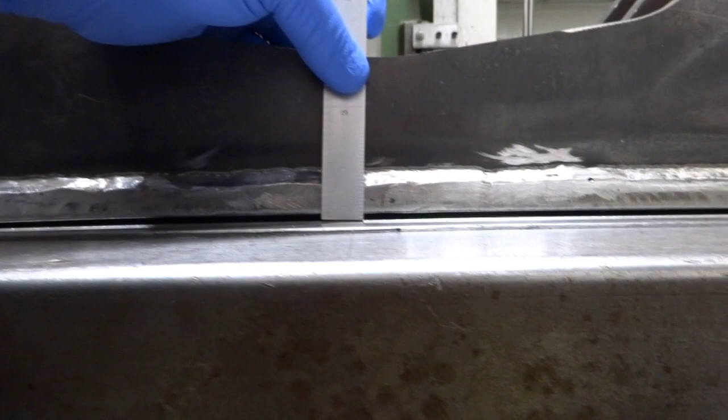This is the frame, all welded up. I was quite happy there wasn't too much distortion. It humped up in the middle just like the original frame did, about 1/8 of an inch. So that's not too bad.

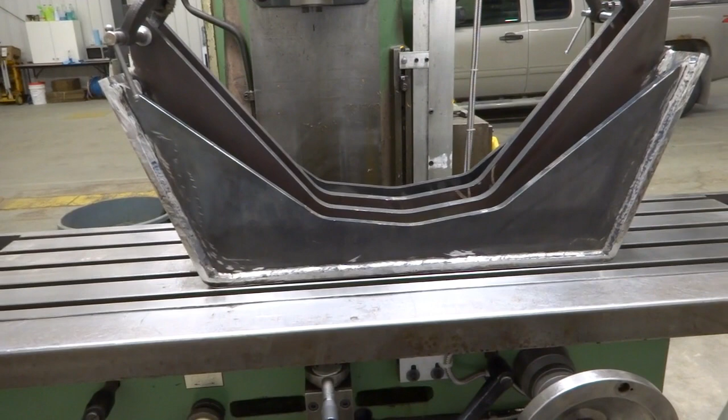I'm going to have to remove that because the piece—if you go back to the first video, you'll see laying on the floor a large piece that attaches to the machine that this bolts to, and it's quite a bit thicker and stiffer than this frame. In the original setup, the bolts are here and here, here and here, and if you bolt that to that part, it'll likely cause the frame to warp.

So I'll do all the work to get the holes bored in straight and everything like that. And then when we bolt it down to the piece, if this hump is in it, it's likely going to warp again and go out of line.

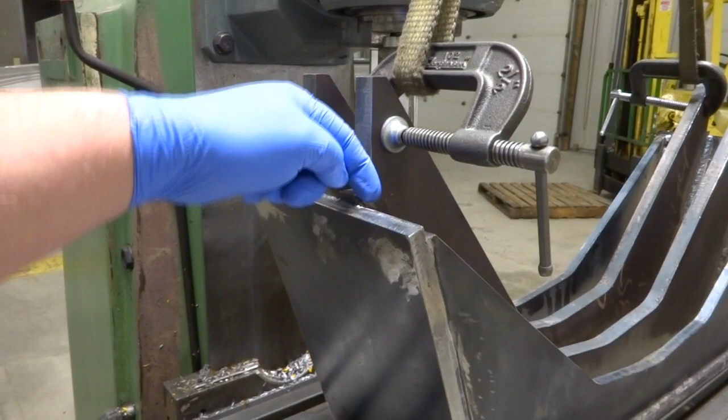So my plan is to take a skim cut along here and clean this up. What I was going to do first, as I mentioned in the earlier video, is machine here and here so the boss plates can go in.

Now, my plan was to machine it—I'll just use this as an example, using an end mill like this to come in and cut this away. In fact, I need a little bit longer end mill. Maybe one more like this.

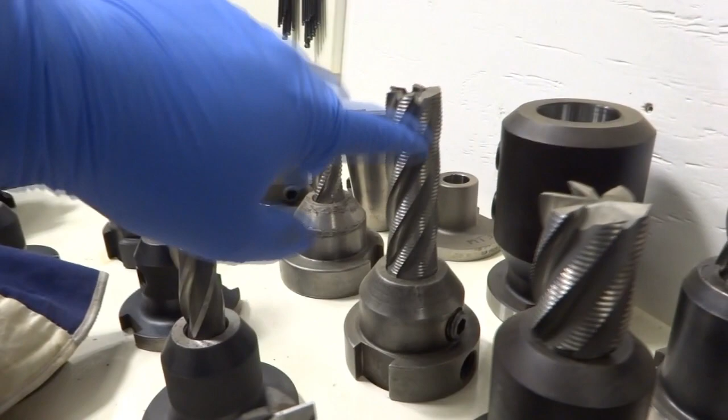But if we look here, you can see there's no way I can get an end mill holder in that vertical head and have it not interfere with the part. I guess what I'm trying to say is the part is too tall. I've got the knee bottomed out—right now it's as low as it can go, and you can see the frame is too high.

So yesterday afternoon I spent a little bit of time scratching my head trying to figure out how I'm going to actually machine this, and I came up with a plan which is roughly drawn out here.

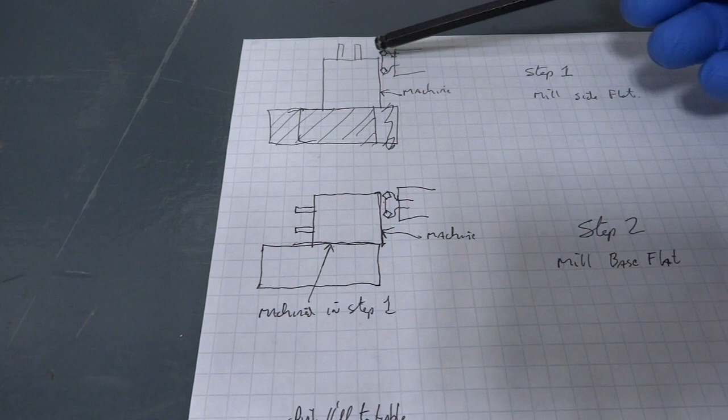The first step—this is looking at that frame from the end. These two pieces up here are these pieces here. My plan is to mount it essentially the way it's sitting on the milling machine right now, overhang it past the table slightly.

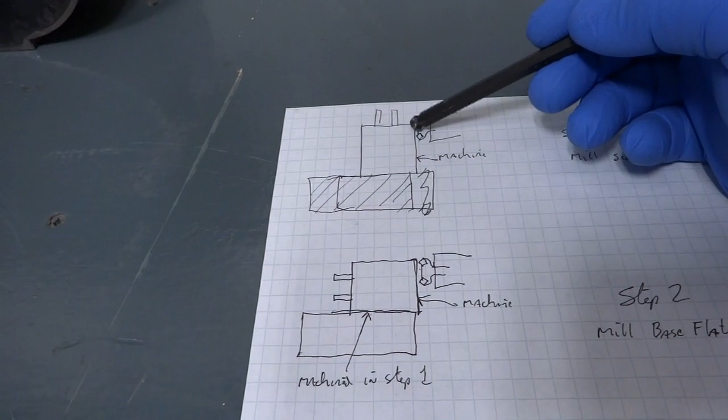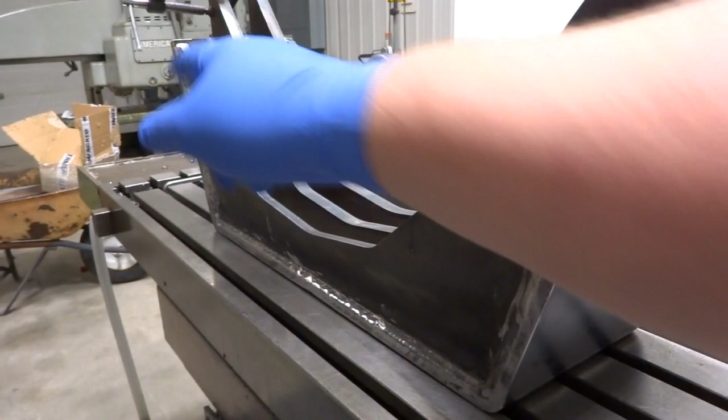Then go with the face mill and machine the edge—that'll be this edge. These pieces were three separate pieces, the bottom and the other side. I tacked them together holding it by hand, so these aren't necessarily perfectly in line. They were welded and then the welder cleaned them up, so I can't rely on this to be a flat surface.

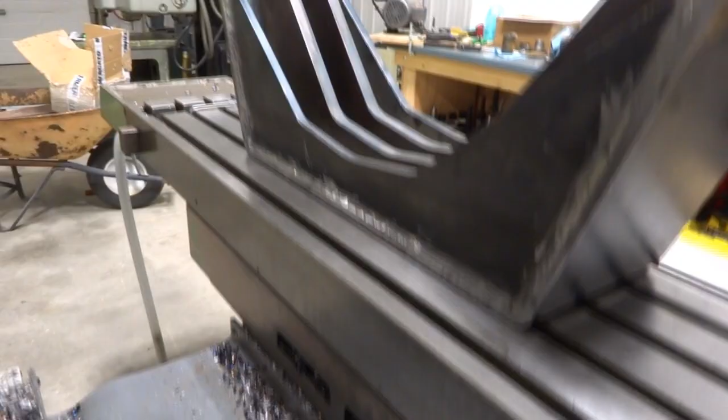So if I slide this over so it overhangs the edge of the table, and I take the vertical head off and use the horizontal spindle, I can come in here and clean this edge up and get myself a flat edge.

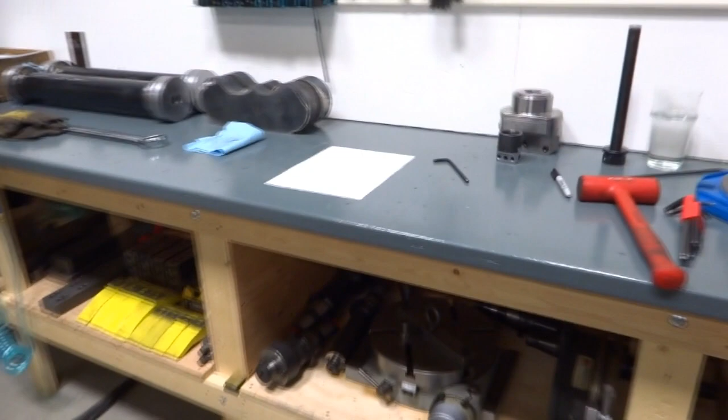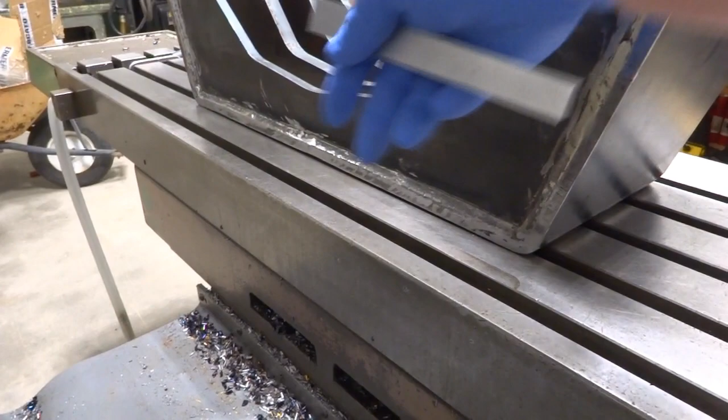Then the next step is to take the piece and lay it on the edge that was just machined, overhang it over the back of the table again slightly, and expose what's currently the bottom of this frame. So essentially turn it so that this surface under here that's got the hump in it will be facing the milling machine. Then I can take passes.

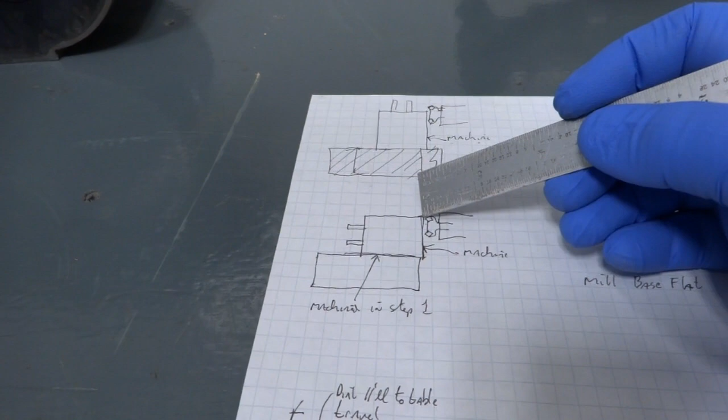Again, this is supposed to be my face mill—this face mill. I can take passes and get it flattened out, get rid of that hump.

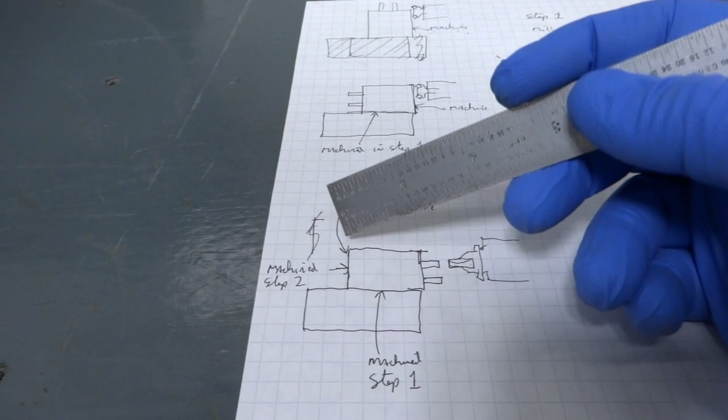And once that's done, I can mount it on the table in the opposite direction to the way it was here, where it still sits on the side that was machined in step one, and the back side is facing the opposite direction now. But now I can run a dial indicator along that back side while I move the table back and forth, and get the back side parallel to the travel of the table.

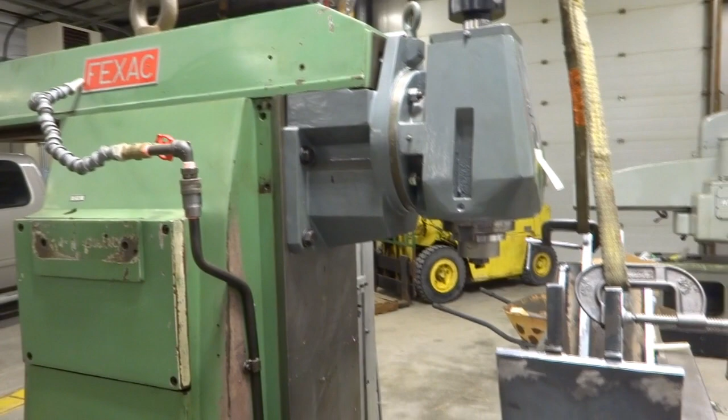Then I can come in with the end mill and the horizontal mill and machine this for these pieces exactly the same way as I would have with the vertical head, except this part will be laying over on its side, and I'll do it with the horizontal spindle up there. So that's the plan.

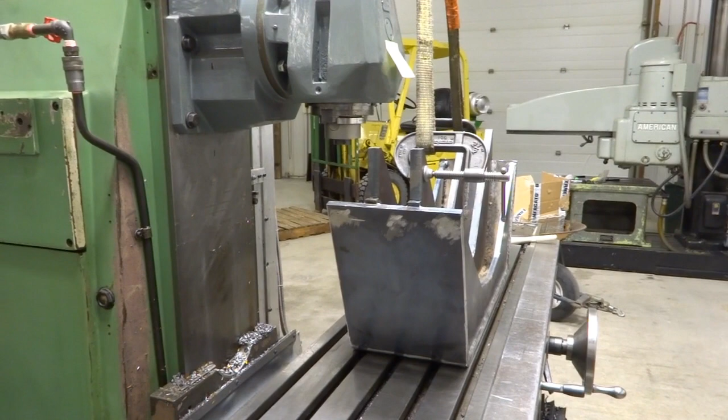It's a little bit more work. I have to take the vertical head off, but at least I can do it, and I end up with all the same surfaces machined the way I want them. So it should work okay, I hope. Anyways, we'll see how it goes.

In order to do the milling I was just talking about, I have to remove the vertical head. Thought maybe I'd show how that's done on this particular mill. I'm sure they're all fairly similar, but anyway, I'll just show you how to do it on this one.

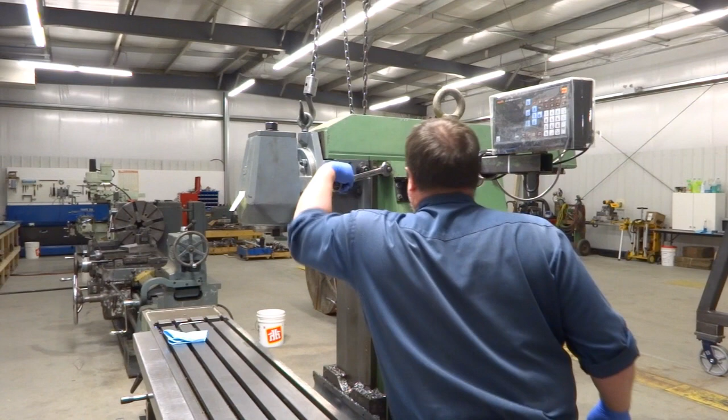This head is held with 4 bolts, 2 here and 2 on the other side, and that holds it to the column. Inside here is a piloting diameter, and around the spindle is a diameter that sticks out that meshes with the piloting diameter to ensure this is mounted concentric with the spindle, because inside the spindle is a 50 taper arbor with a spline shaft sticking out of it that meshes with a female spline in here to drive the vertical head.

So it needs to be lined up fairly close. This vertical head is also held here, and when you tighten those, it pushes pins in and drives a movable gib into the dovetail of the overarm. This overarm is actually on the body of the mill. When you tighten these, it actually pushes on the overarm and drives it in that direction, forcing the overarm against the dovetail on the far side, which is obviously very accurately made.

So it's always being pushed against the same surface. Tightening these on the vertical head does the same thing - it draws the vertical head against the opposite dovetail. So in effect, it causes the dovetail on the opposite side of this to register against the dovetail on the opposite side of the overarm, and the dovetail on the opposite side of the overarm registers against the dovetail on the body of the mill. So on that far side, all 3 of those dovetails are tight against each other, and it adds rigidity.

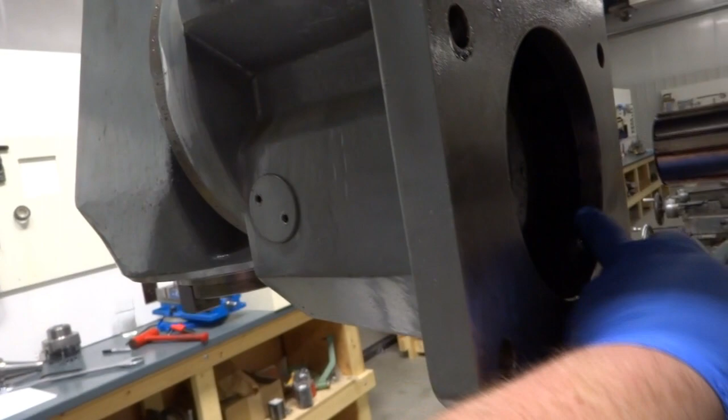You can see the spline shaft - it drives the female spline in there, and then this diameter is the pilot that rides inside of this bored hole. It's a very close fit, so that keeps it concentric for the shaft alignment.

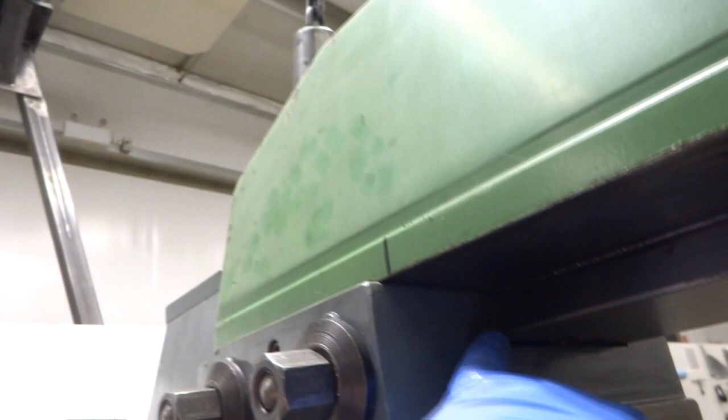Up here you can see the gib that gets pushed by these pins when you tighten the bolt down.

Now what I'll do is I'll just snug this one back up so the overarm doesn't slide out. Now I got this on the crane already. Now I should be able to slide the head off the overarm and at the same time let the crane take the weight.

That's what the back of it looks like. Just that female spline there. There's a series of bearings and lots of grease, gears, stuff like that in there. I've stripped this, cleaned it, and put it back together, and everything in there is nice and big and heavy, so that's good.

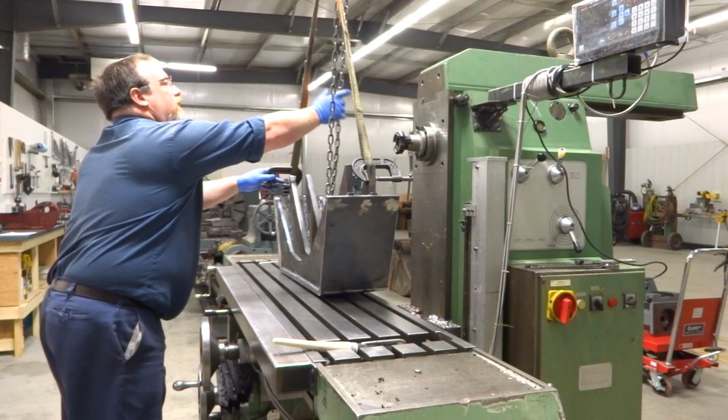Now I'm setting this up. This is step one, so I can machine this surface with this face mill. So I need to get it roughly parallel to the travel of the table.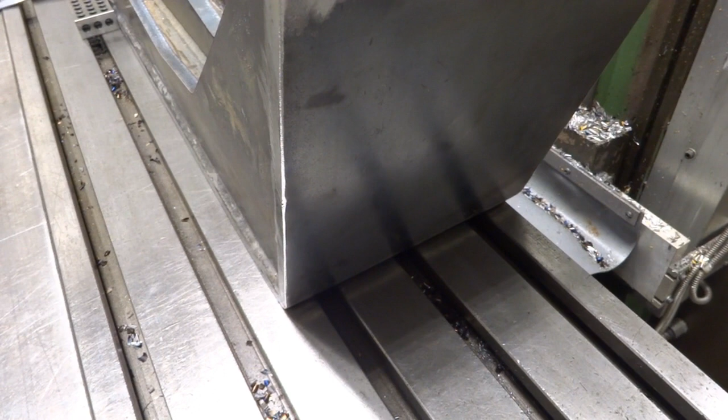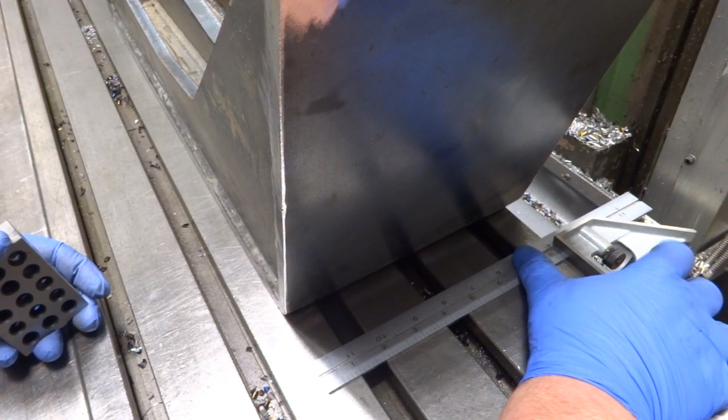What I'm going to do is just use my sliding square and a 1-2-3 block, and set it using the back surface because it's easier to get at. I put that against the back of the table, then put the 1-2-3 block against here, and push it until it touches, then repeat the same at the other end. Push till it touches, and it is — that'll be good enough to line up for the initial machining. I'll check that again.

I still have to set my clamps up and everything. I'll likely knock it out of place, so I'll get it clamped up, and then just before I snug it down, I'll check that again.

To clamp this down before I mill the edge, I wanted to clamp it near the ends because it's actually resting down here and here, since it's humped up in the middle. So probably the easiest way is just to clamp it at the ends and down to the table.

I just got about a month ago these two Armstrong planer jacks. They're 8-ton jacks off of eBay, and I cleaned them up and got them working. They were actually in pretty good shape when I got them, but I cleaned them up and put some moly coat on the threads. So this is my first time using them.

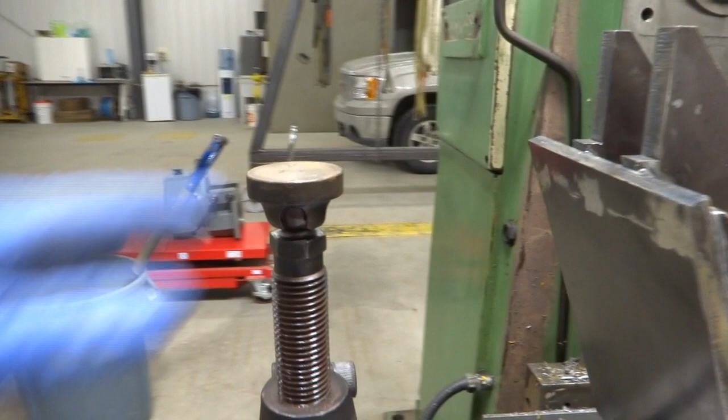I'm just going to use them like a block to hold the clamp up, to brace the back of the clamp. Anyways, I'll just show you how I'll do that.

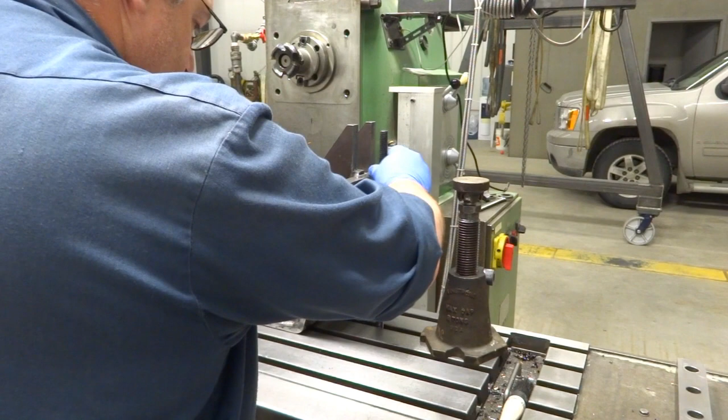So I had to extend these. This is pretty high, so these coupling nuts that come with your clamping kit come in quite handy. These are the clamping bars I made before — I think I showed them in an earlier video. I think when I was actually clamping the other one of these down, I used these. Very handy for big stuff like this.

There. I'll slide it in — as most of you know, when you clamp, you want the bolt as close to the object you're clamping as you can get it. So I can slide that in until it's almost touching. I don't like to go right up against it; I like to be back just a little bit so there's some weight on the block so it doesn't loosen up. But there, that's the one.

With this setup, it leaves me enough space here to get the square through with the 1-2-3 block to check the alignment with the table. The nice thing with using the planer jacks for this is that you get kind of infinite adjustment — you can get your clamping bars as level as you want. It's nice.

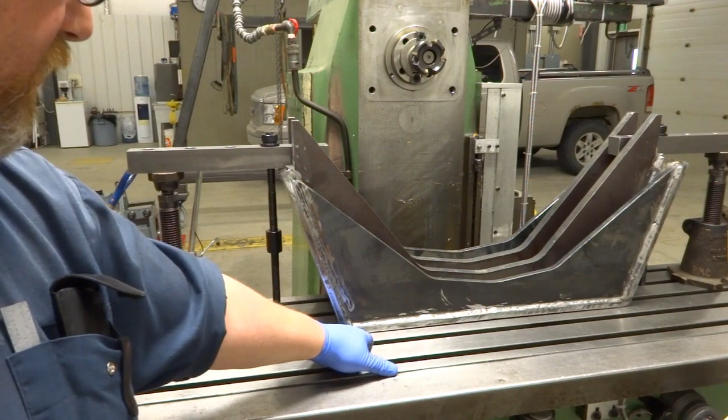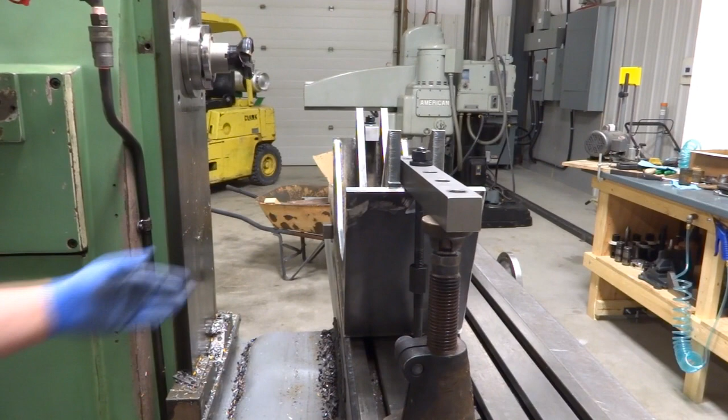Now, one thing I am doing is the line of force of the clamp is here, and so that's being applied here on the frame, and of course it's touching here. So there is a moment arm here that can cause twisting. However, this is very heavy and thick, so it likely won't spring, and if it does, it doesn't really matter that much because I'm machining this face — if this were to spring this way, it's not necessarily going to cause this edge to move in or out. So I don't think it'll be an issue, and it's just a lot more convenient being able to clamp that way.

Before I do that, I gotta check the alignment again. That's just touching. So they're aligned about as parallel to the table travel as one can get.

Now I can tell this is not going to flex much, because the wrench goes from easy to very hard to turn very quickly, meaning it's not really springing. If it was springing, you'd get that spongy feel on the clamp bolts when tightening them. This is not spongy at all, so I think this is pretty solid and hasn't sprung. So I think we'll do okay with this.

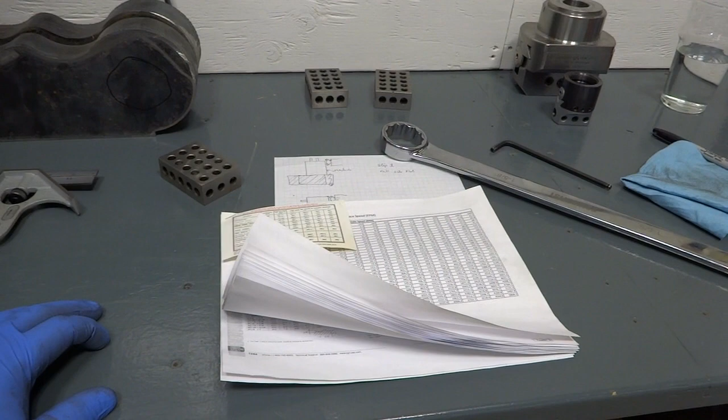Now for speeds and feeds on the milling machine. Before I had this milling machine, I just had my Bridgeport clone with a variable speed drive power feed on the table, so you never actually knew how fast it was going. It just became a matter of experience and judging how the cut was going, making adjustments on the fly. With this mill, it's actually got, like most mills like this, a definite discrete set of feeds.

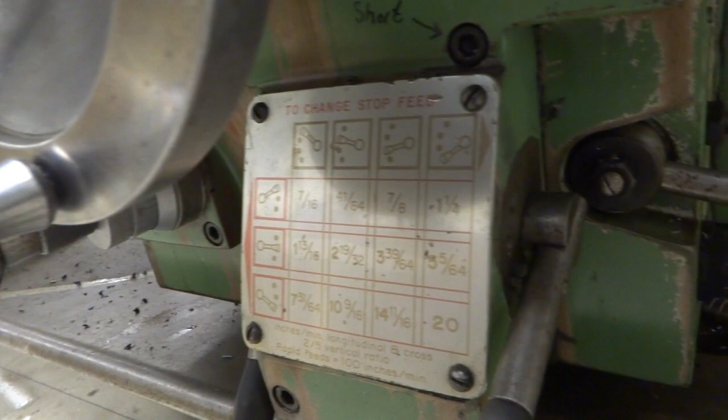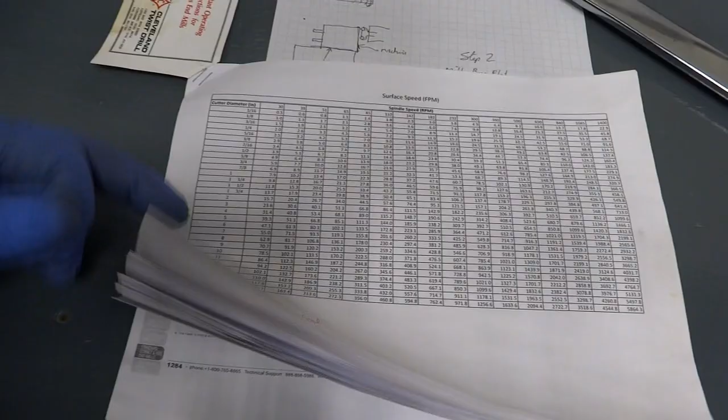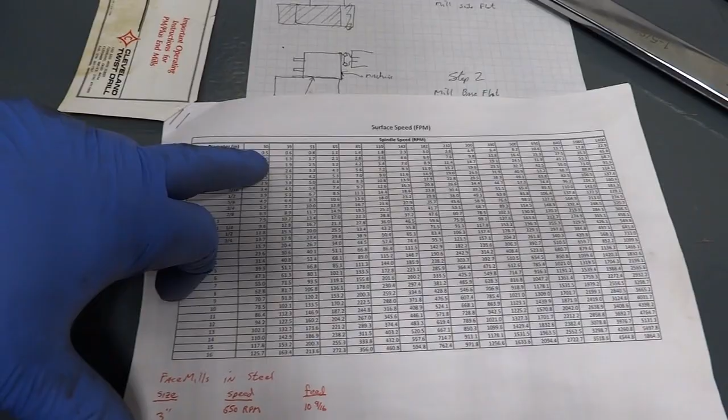So I made a chart up to help me — let me get this out of the way. What I did is I made this surface speed chart. I have the cutter diameter down the side, all the way up to 16 inches, which is unlikely, but there was room in the spreadsheet. Across the top are the actual spindle RPMs available from the gearbox. In each cell, it tells you — if you've got a 1-inch end mill, let's say, and you're running it at 142 RPM, you'll get 37.2 feet per minute. It's not normally how you use this chart.

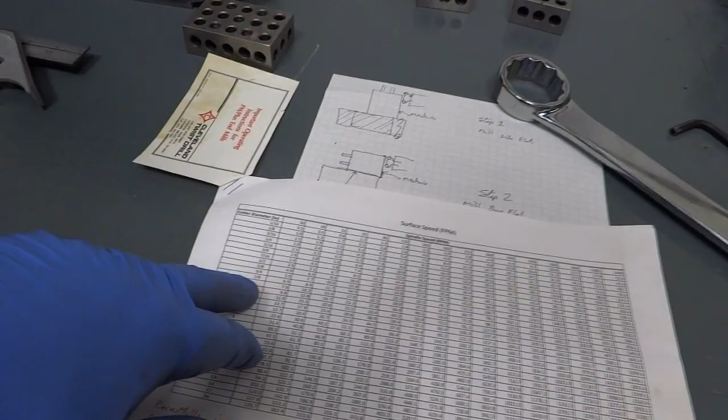Normally you know the surface feet you want, and you know the diameter, so you just go across. Say that 1 inch you want to run it about 60, you just go across, and there's 60.7. Not sure if you guys can see that or not. That's 232 RPM, so you can set that. I got this thing, came with a Cleveland end mill I got, and it gives you a recommended surface feet per minute, so I just staple it on as a guide.

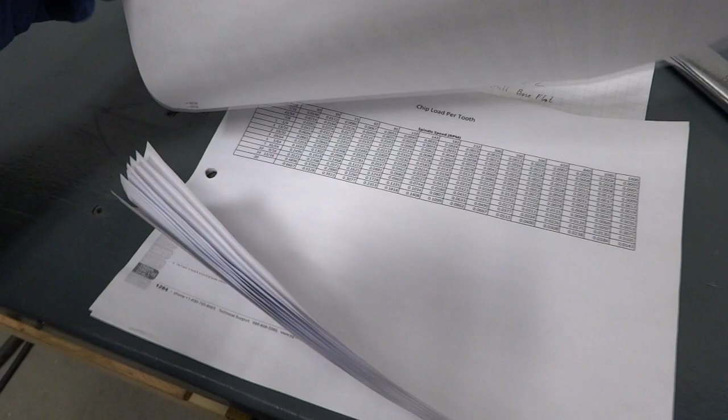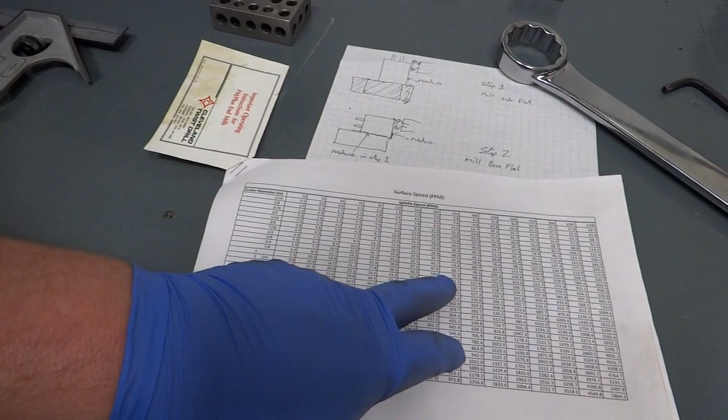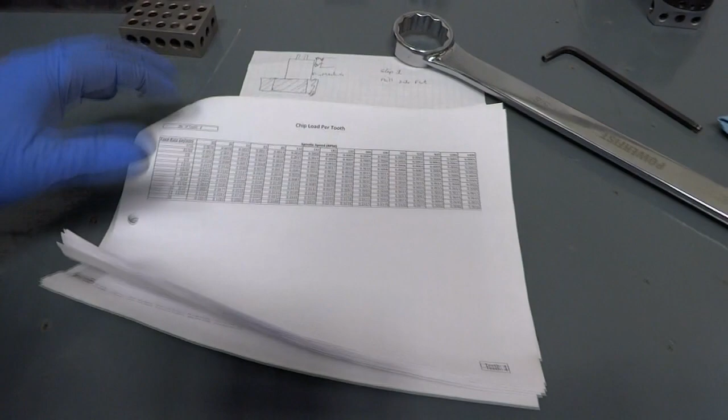And then I have these charts, and this is to calculate the feed. What I've done is each page has a tooth number up to about 10. So if you're using a 1-inch end mill with 4 flutes and you wanted to run at 60 feet per minute, you'd say right there, 60.7, which is 232 RPM. It's got 4 flutes, so you go to the page with the 4 teeth. And then you get the chip load per tooth from the tool manufacturer. They'll give it, or from other tables.

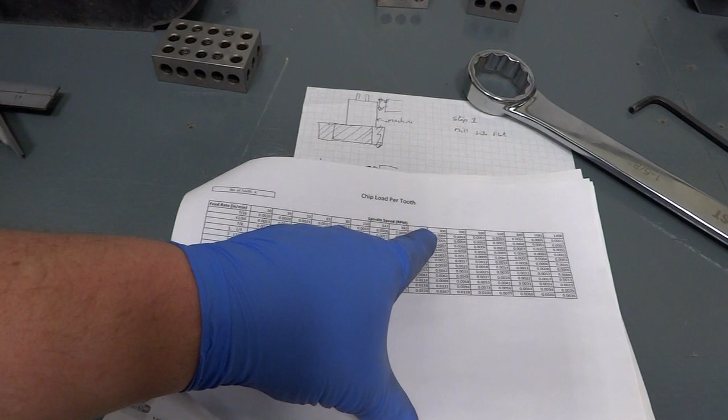But knowing the speed you're going to run at, which is 232, and saying you want, I don't know, 4 thou per tooth, you go to 232 RPM, which is what you're going to run it at to get the right surface feed. You go down here till you get close to 4 thou. Right there's 3 9/10. Then you just come across and there's the feed rate, 3 and 39/64. And these are the actual feed rates on the feed box of my milling machine.

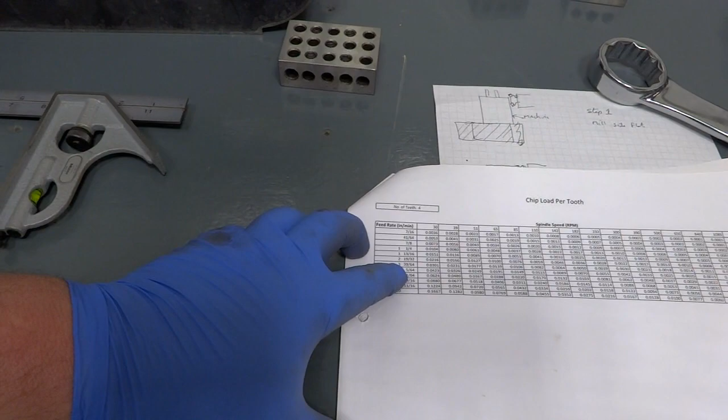So it makes it pretty quick, because I was sort of lost. I was having to calculate these each time I went to get a tool. So I just took a little bit of time and made these spreadsheets, and they've been very helpful. So now, having said that, for my face mills, the two that I have, I found some speeds and feeds that worked, and I just jotted them down on the front page.

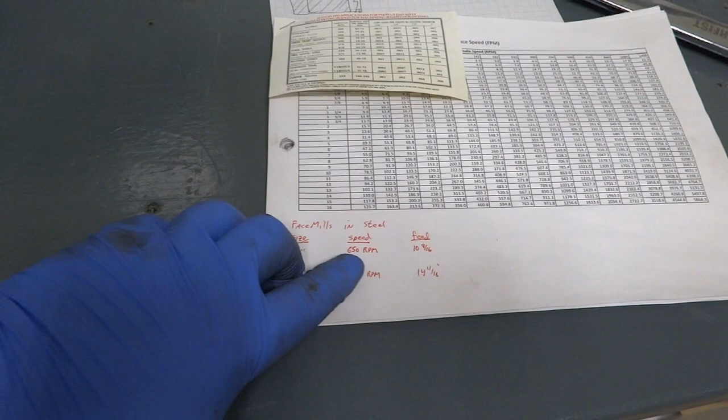So I'm going to use this 3-inch face mill, so I'll run it at 650 RPM and 10 9/16 inches per minute, at least to start, and then we'll see how it goes. If this is a rigid enough setup, it should be able to handle that. If it isn't, then a guy will have to change accordingly so it doesn't vibrate apart.

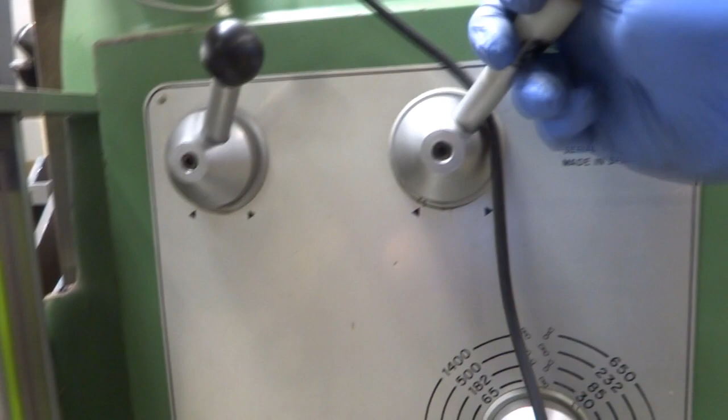So 650 and 10 9/16. So just go to here. This has got a pretty easy to use gearbox. There's 650. I'm on it with this lever, and then it's just that one out, that one out, and that's 650 RPM.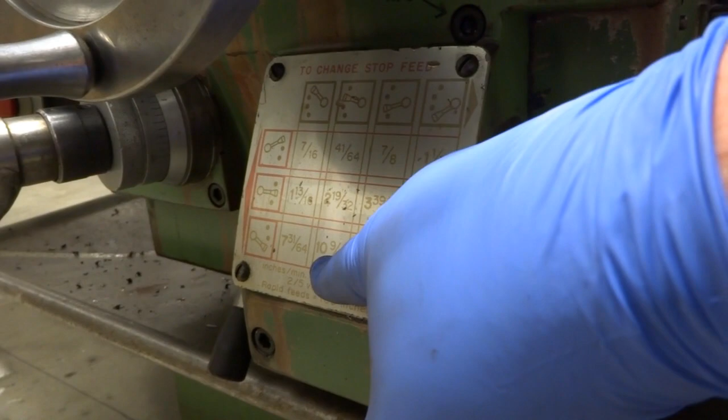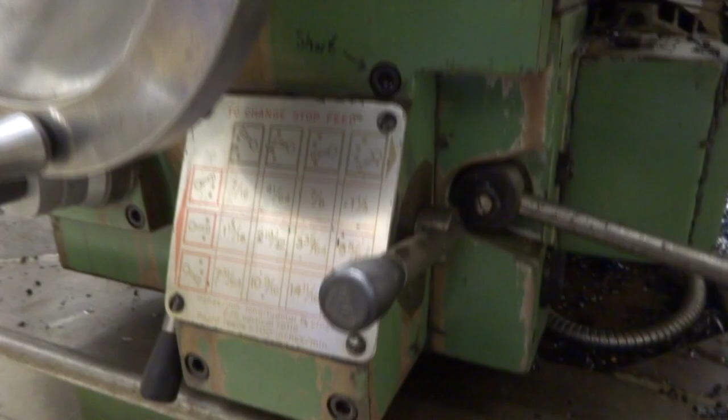The feed, I want to go 10 9/16. So we can see that 10 9/16 is here. So we go up. It says this lever is supposed to be in the second notch from the top, and this one should be all the way down, which it already is. So there's 10 9/16. So I got my speed and feed set. So it's pretty quick, especially if you have the numbers written down ahead of time.

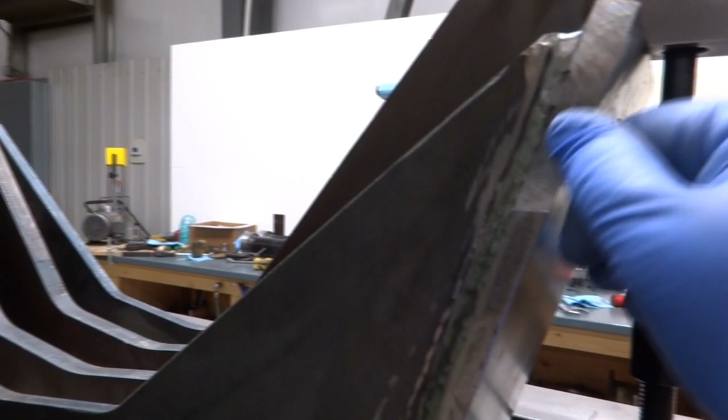See the cut here, so that cleaned it up, and you'll see it there as well. So I cleaned up both, so I'll keep going with that setting and clean up the whole surface.

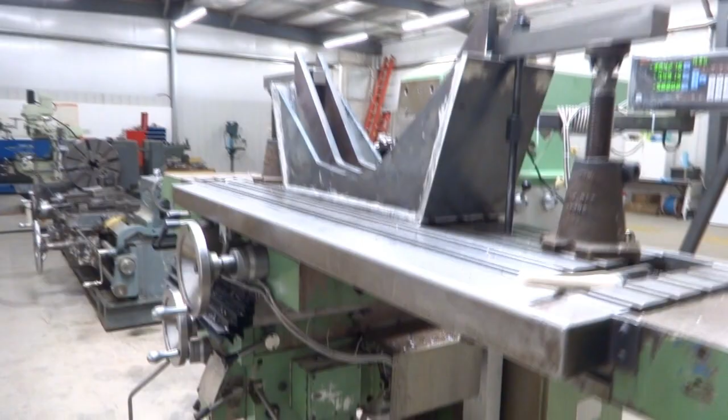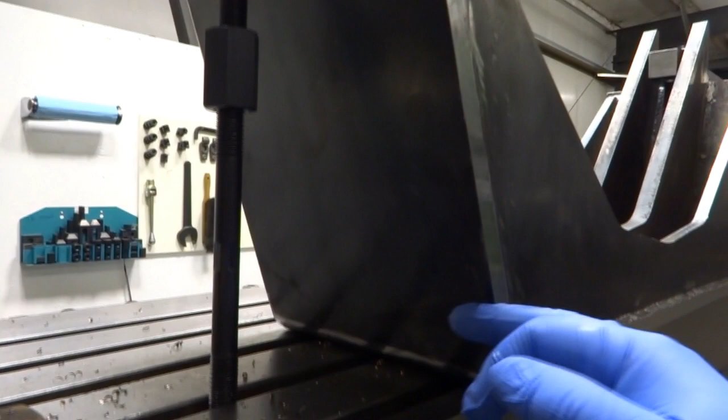I machined the back side of the first step to machine this part yesterday afternoon, and right at the end I realized I had a bunch of steps in the surface, meaning each time I took a pass, there was a line across here, meaning the face mill was either moving in or away with each pass. So I had this rough stepped surface, and the reason for it is the knee on this milling machine has some wear, and what I was trying to do is I had the gibs tightened up. I snugged them up with the locks to try and take the play out, and obviously that didn't work.

So what I did this morning, and I didn't record any of it because it's just more of the same, but I changed to my 6-inch face mill so I could do this job in 2 passes instead of 4. And then I locked the knee very tightly with the, I'll show them here, with the locks, the 2 levers, and it seemed to work.

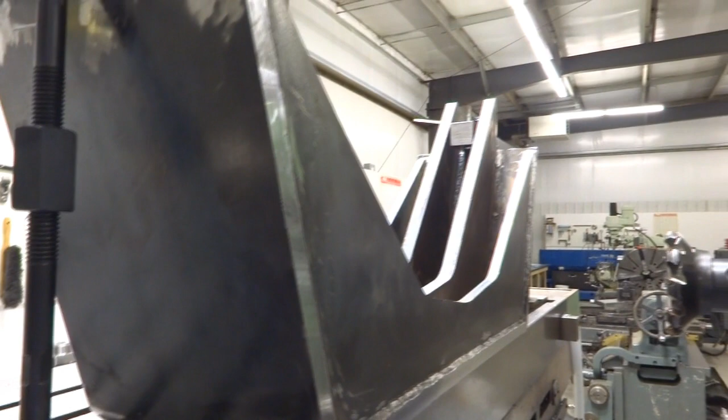I've got just a very slight step right here. I'm not sure if it shows up on the camera, but it's a very slight step there, but it's so small you almost can't feel it. I'd be surprised if it's even a thou. So that's acceptable. Yesterday it was quite a bit, like the steps might have been 5-6 thou. So this seemed to fix it up. So I think the rule for this job is get the knee locked solid before you do any machining, and it'll seem to keep it in line.

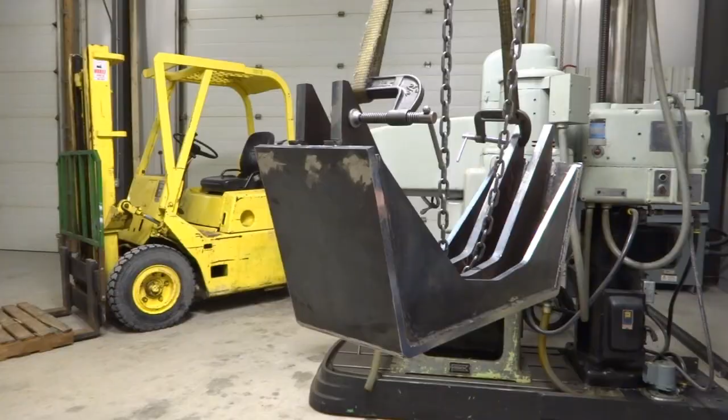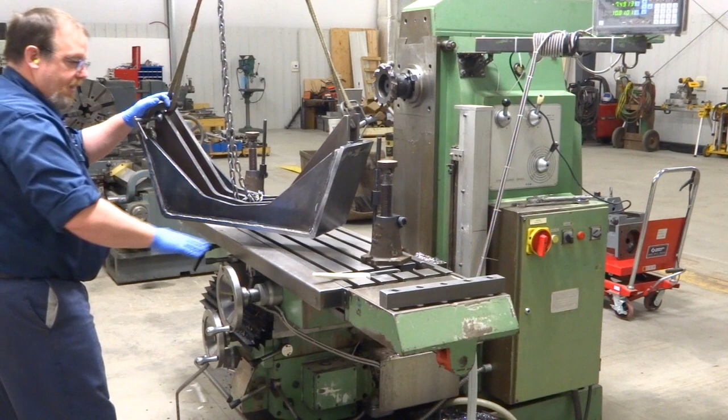So now, as I discussed before on the sheet on my bench there, this is the surface we just machined, and we'll lay that on the table and expose the back to the face mill. Well, it's good, no rocking, so I think it's